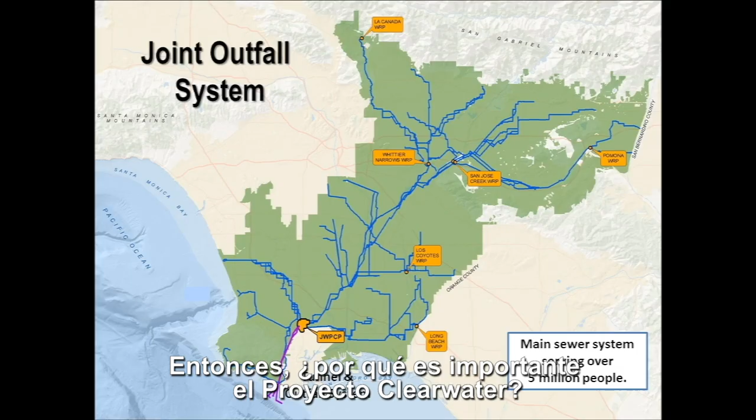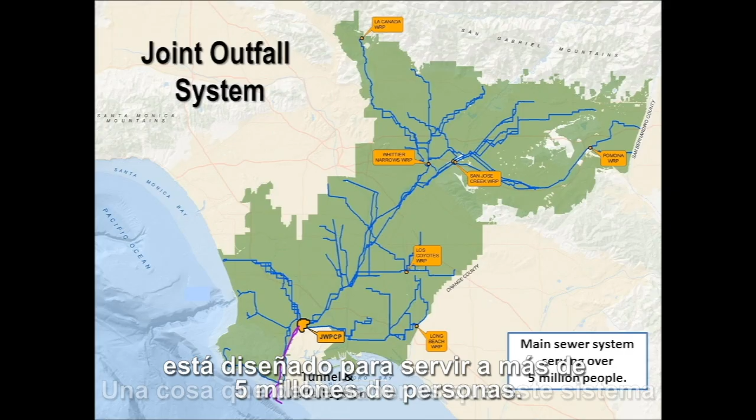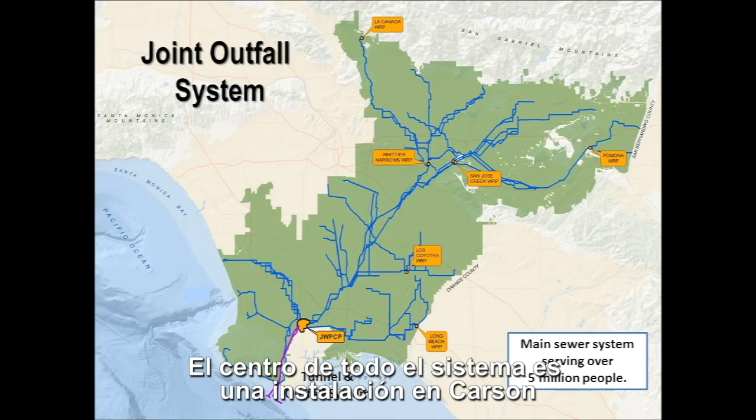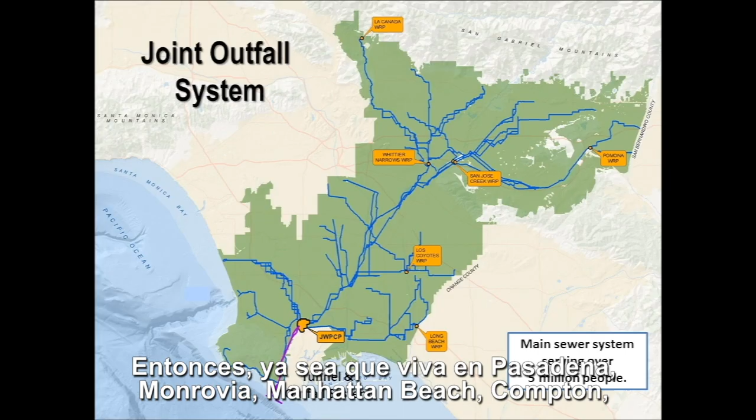So why is the Clearwater Project important? In order for me to answer that question, I need to explain how our Joint Outfall System works. And one thing that you need to know is that this system is designed to serve over 5 million people. And it goes from the beach all the way to the San Gabriel Valley. And the hub of the entire system is the one facility in Carson called the Joint Water Pollution Control Plant. So whether you live in Pasadena, Monrovia, Manhattan Beach, Compton, you depend upon that facility in Carson.

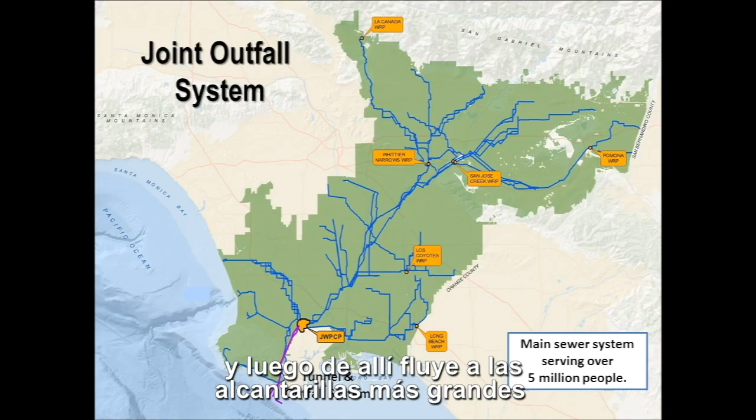And here's why. Well, when you flush your toilet, that sewage or wastewater goes into the local sewers, and then from there it flows into the larger sewers that we call trunk sewers, which are shown here in the blue lines. And the sewage is directed to one of 7 wastewater treatment plants in the system. The one interesting thing about this system is that 6 out of the 7 plants actually remove the solids and put it back into the sewer system so that it all flows down to our plant in Carson, where the solids for the entire system are managed. And we do that because it's much more cost effective to manage it at one location.

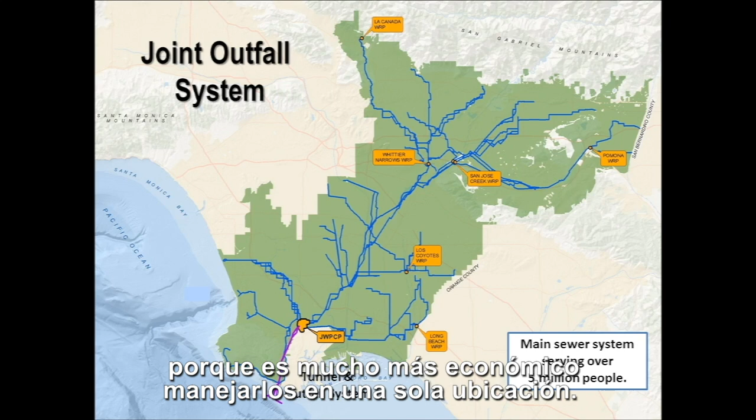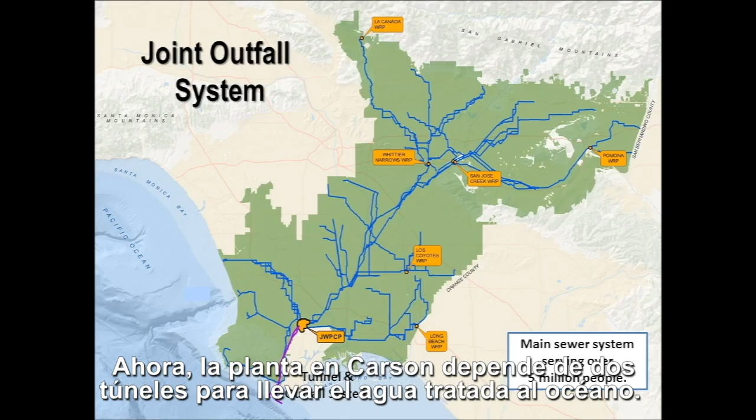Now, the plant in Carson depends upon 2 tunnels to take the treated water out to the ocean. These 2 tunnels, one 8 feet in diameter, the other 12, were built in the 1930s and 50s. So they are old. They're 60 and 80 years old. They weren't really built to current seismic standards, yet they cross 2 earthquake faults.

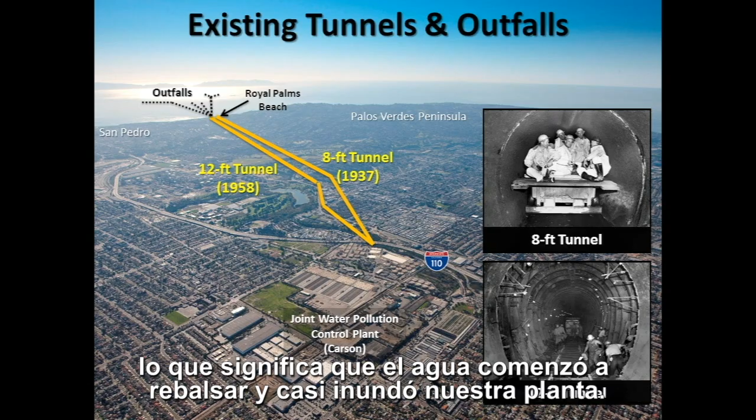They also have a limited flow capacity, which really comes into play when it rains across the LA area. And that is because rainwater gets into the sewer system and the flows going into the Carson plant can more than double, which means the flows going through the tunnels can more than double as well. And back in January of last year, 2017, there were major storms that came through the LA area, and the flows to the Carson plant more than doubled and almost overwhelmed the capacity of the tunnels, which meant that the water started backing up and almost flooded our plant.

So what would happen if the existing tunnels were to collapse because of an earthquake, or there's just way too much water for the tunnels to handle? Well, sewage would still flow into the Carson plant. So the treated water coming from the plant has to go somewhere, otherwise the plant will flood. And we can't have that because it would knock out all the electrical equipment that's there, and it would take months, if not years, to restore to normal operations.

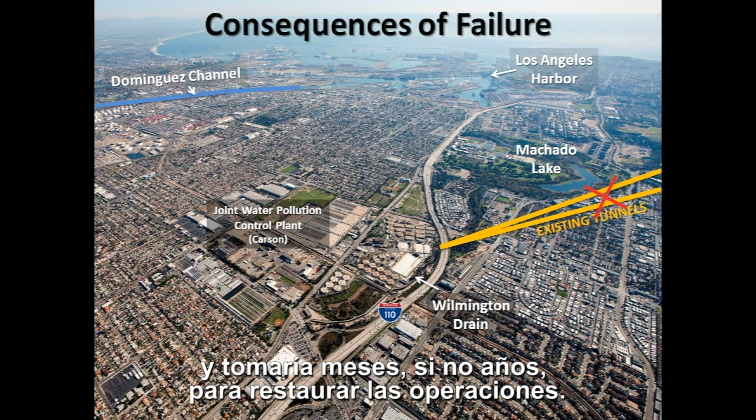So we would be basically in emergency mode. So what we would have to do is to allow treated or partially treated water to come out of the plant into the Wilmington drain and let it flow into Machado Lake.

Many of you know that a lot of money has been spent in restoring Machado Lake, making it into a precious resource. Well, under this emergency situation, this unauthorized, unpermitted discharge, that investment would be jeopardized. But let's say that that measure was not enough. Maybe the Wilmington drain was full of stormwater already, or there's just too much flow going into the plant. Well, now we have more dire measures to consider.

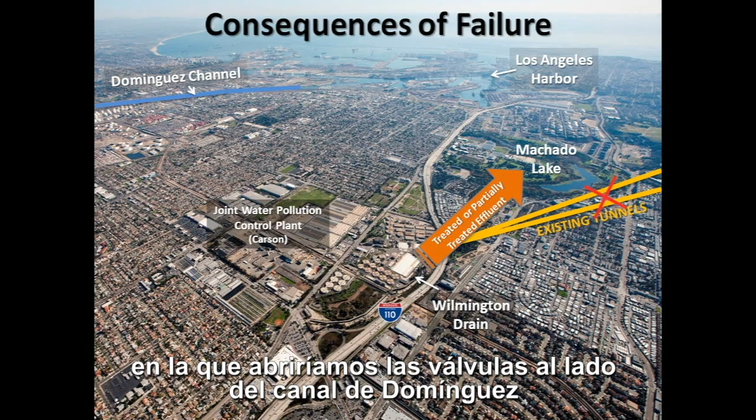We can either let the sewage come out through the manholes and onto the streets, and of course, we wouldn't want that because that impacts public health. So now we would be faced with an even more dire measure, in that we would look upstream, open up the valves next to the Dominguez Channel, and allow raw sewage to go into the channel. And of course, that would flow into the Los Angeles harbor and eventually into the surrounding beaches.

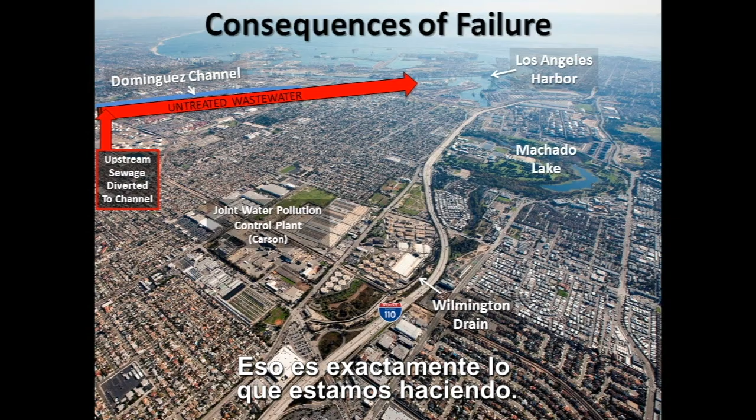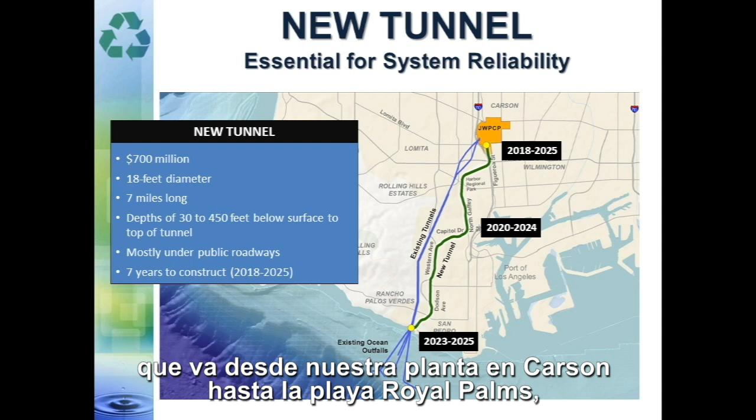So rather than wait for this situation to occur, we want to do something about that today. And that's exactly what we're doing. Which is why we're building a new tunnel that will go from our plant in Carson all the way down to Royal Palms Beach, where we're going to connect the new tunnel to our existing ocean outfalls, shown here in the purple lines. Now, if you don't know what an outfall is, it's basically a pipe that goes at the bottom of the ocean outward, and at the end of the pipe are holes so that the treated water can just flow out into the ocean.

And one thing you'll notice is that the existing tunnels shown here in blue are pretty much like a straight run down to the beach from our plant in Carson. Whereas the new tunnel, shown here in green, is kind of a squiggly line. Well, the reason is because one of the things we heard over and over again from our outreach a few years ago is that people didn't want the new tunnel to go underneath their homes. They would rather have the tunnel go underneath the streets. And that's exactly what we're doing. So the tunnel will follow the streets and under Harbor Regional Park.

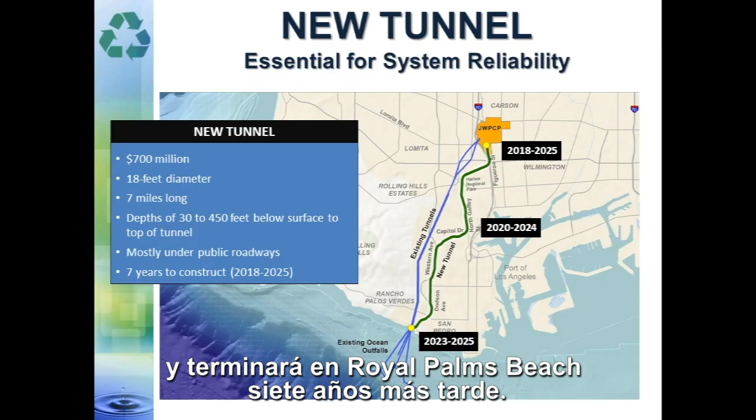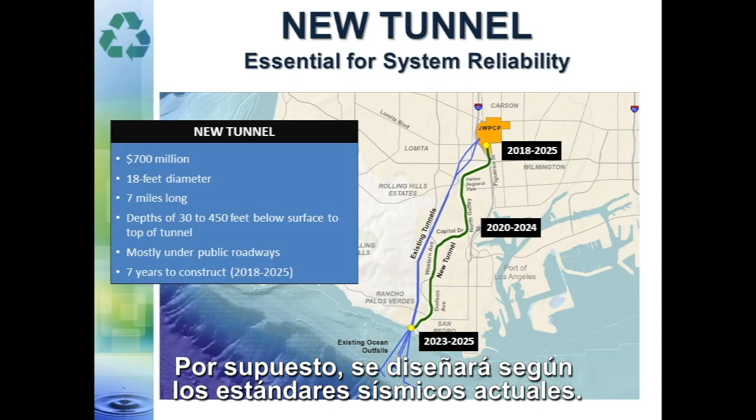So construction will begin later this year in Carson, and then 7 years later, it'll end at the beach. The new tunnel will be about 18 feet in inside diameter, enough to manage the storm water flows. It'll be 7 miles long, and it'll cost about $700 million to construct. And of course, it'll be designed to current seismic standards.

But more importantly, the tunnel boring machine goes about 5 feet, it stops, and then the walls for the tunnel are put in. And then once that section of tunnel is put in, it goes another 5 feet, it stops, and then the next section of tunnel is put in. So the tunnel is built as you go, which means there is never empty space for the surrounding soil to go into. It's always reinforced, and it supports everything above it, all the way up to street level.

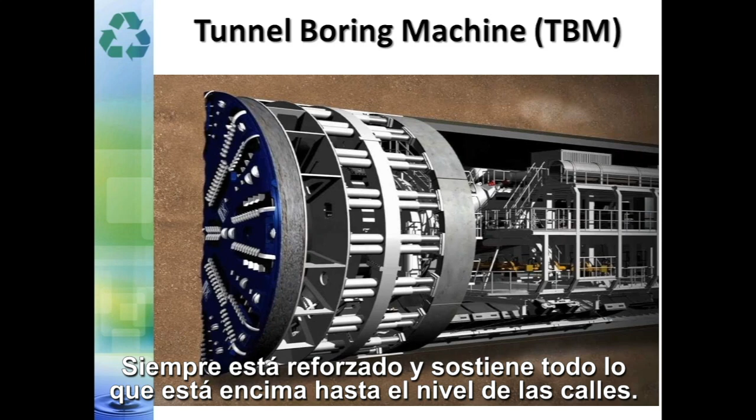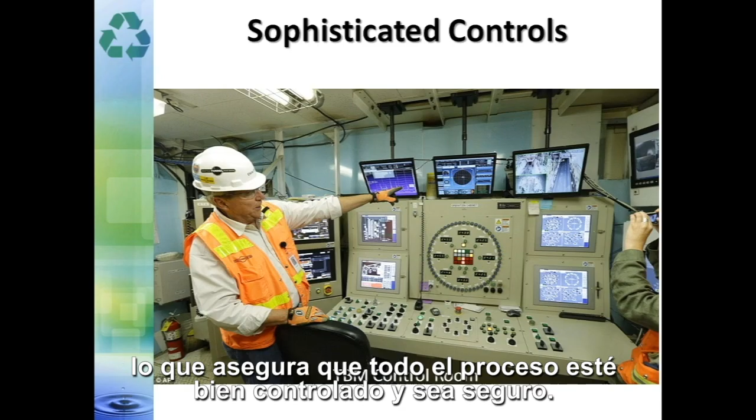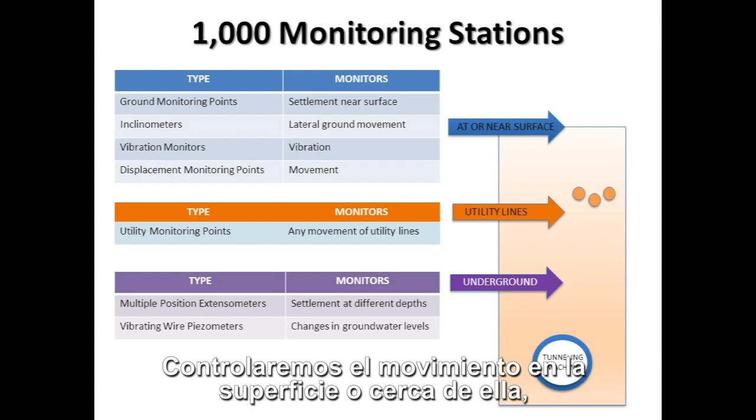If you were to go inside one of these tunnel boring machines into the control room, you would see that everything conceivable is being monitored, which makes it for a very safe and controlled manner of tunneling. Even so, along the tunnel alignment, we're going to have 1,000 monitoring stations where we have sensors at street level to monitor for movement. We monitor the utility lines underneath the street, and we have sensors that go all the way down to the tunnel boring machine, kind of like an early warning system. And so with this comprehensive system, we protect the street above and the adjacent properties.

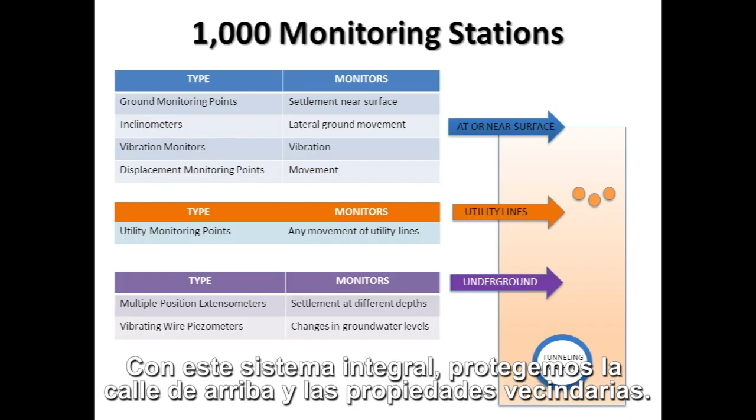As I alluded to earlier, construction is going to start at our facility in Carson. If you were to drive there and go to the corner of Lomita and Figueroa, you would see an empty lot, which is part of our facility. And in that lot, we're going to construct a shaft that's between 50 and 60 feet wide so that it can be used to lower the tunnel boring machine and then allow it, once it's lowered, to start the tunneling.

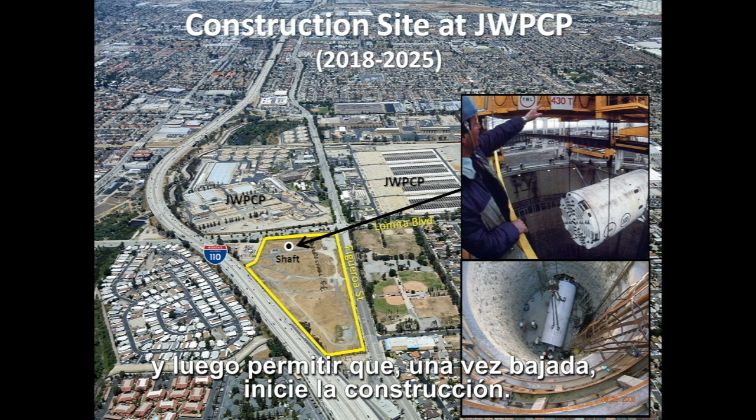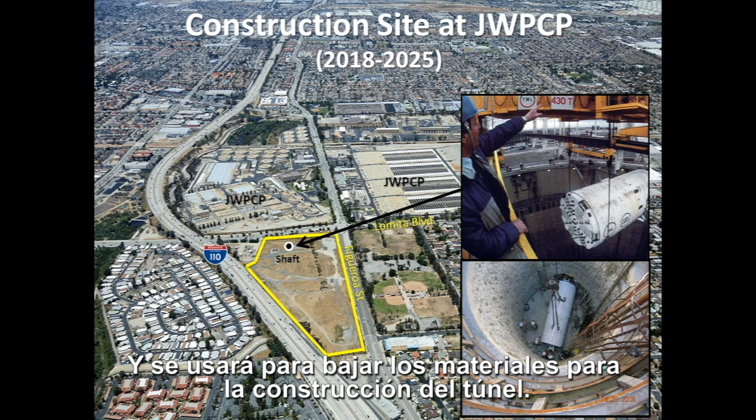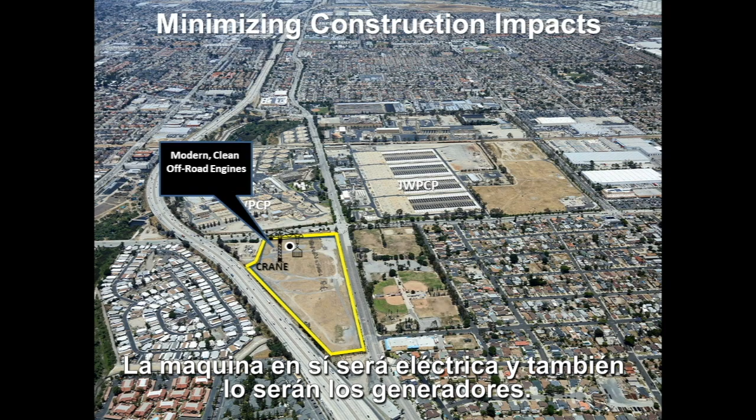That shaft will also be used to remove all the excavated soil from construction, and it'll be used to lower the materials, the tunnel wall sections, for the construction of the tunnel itself. Now, one of the things that we pride ourselves in is being good neighbors. We have done so since we were there decades ago, and we want to continue to do that during construction, which is why the tunnel boring machine itself will be electric. The on-site generators will be electric. And the equipment that requires engines will have modern, clean engines.

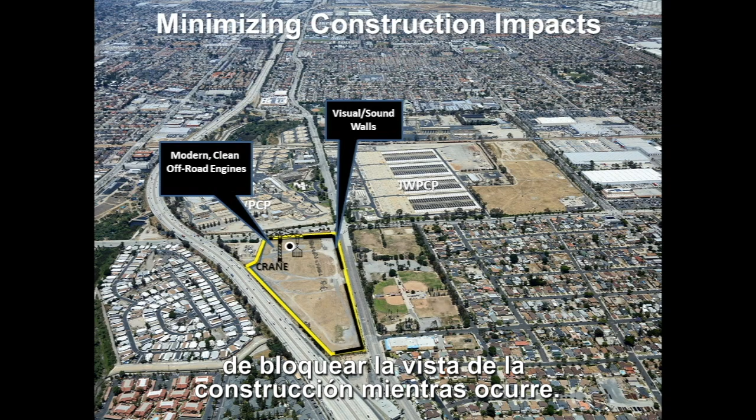We're going to have a sound barrier to avoid sounds from impacting the surrounding neighborhoods. That barrier will also serve as a way so that you don't see the construction while it occurs. The trucks that haul away the dirt will also have clean, modern engines, and the trucks will be directed away from the homes.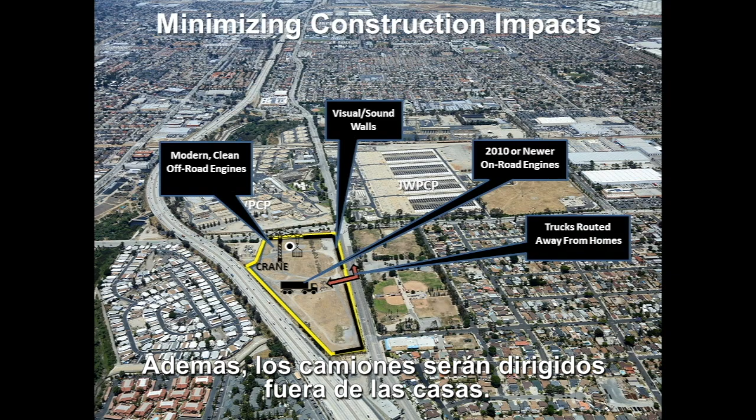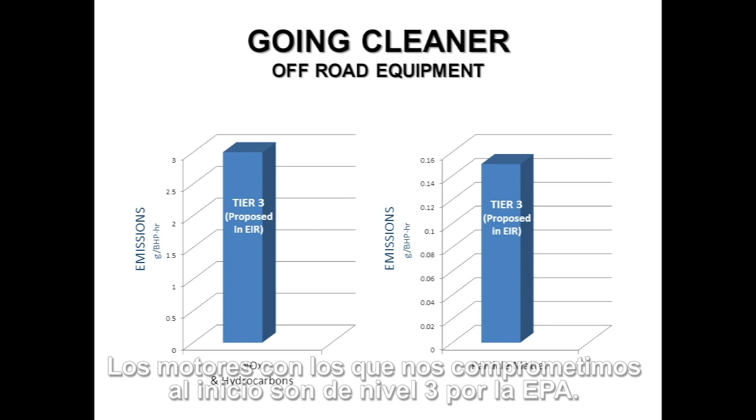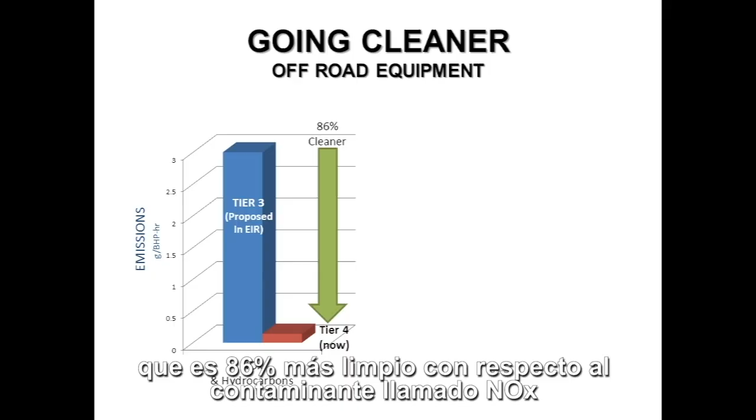So one of the things we committed to early in the planning process was to use clean engines. And the engines we committed to, EPA calls tier 3. But we're going to step it up. We're actually going to use tier 4, which is 86% cleaner with respect to the pollutant called NOx, and 90% cleaner with respect to particulate matter. Our mission is to protect public health, your health, and that's exactly what we're doing.

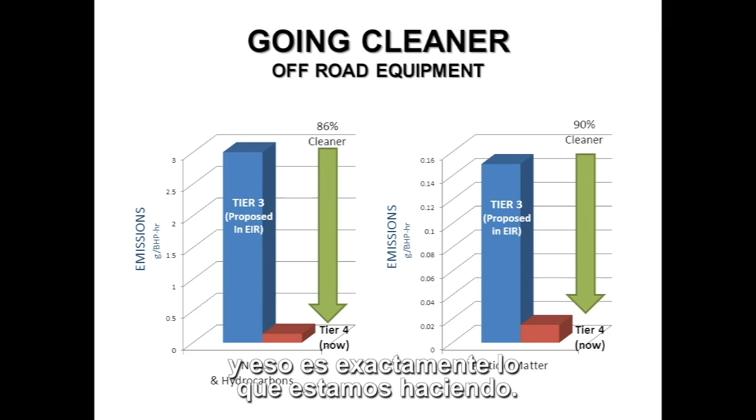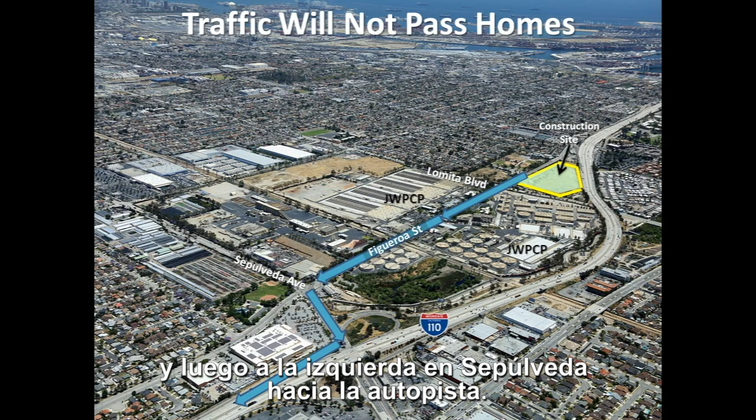As I mentioned, the traffic will not pass by homes. Instead, once the trucks leave the site, they'll take a left turn on Figueroa, go to Sepulveda, make a left, and get right on the freeway. Now you're probably wondering, well, how much truck traffic are we talking about? Well, if you compare it to existing traffic on Sepulveda, you're talking about an increase of 1 to 2%.

But notwithstanding, we're going to work with the City of Carson in developing a traffic plan. We're also going to look, in conjunction with the city, to see if any improvements can be made at the traffic light there. Additionally, we're going to try to avoid peak hours for traffic.

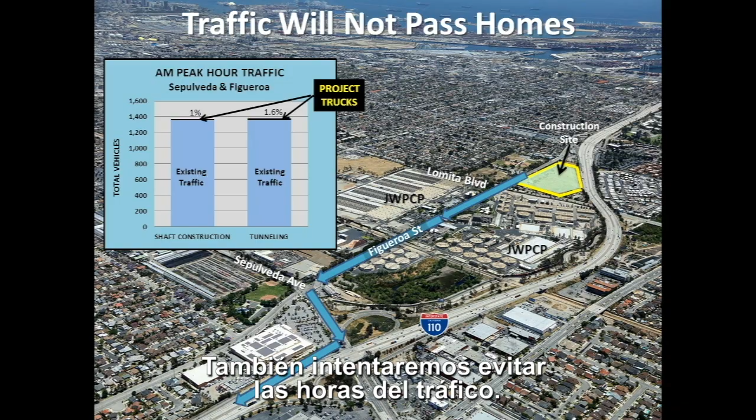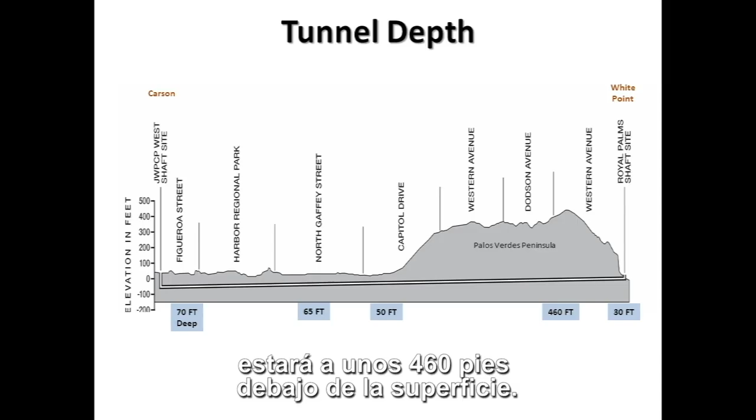So once the tunnel boring machine is in the ground, tunneling will be invisible until it daylights at the beach 7 miles later. It'll start about 70 feet below the surface, and then once it gets into the Palos Verdes Peninsula, it'll be about 460 feet below the surface. And just before the tunnel boring machine reaches the beach, we will have a small shaft constructed so that we can remove the machine and so that we can start the work of tying in the new tunnel with the existing ocean outfalls.

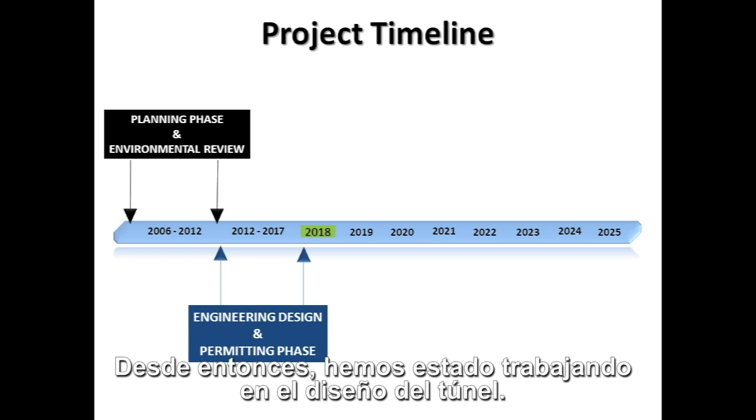So let's look at the timeline for the project. As I mentioned, we're done with the planning phase. The project was approved by our board of directors in 2012, and since then we've been working on the design of the tunnel, which we are wrapping up. And later this year, we will start construction in Carson, and the construction will wrap up 7 years later at the beach.

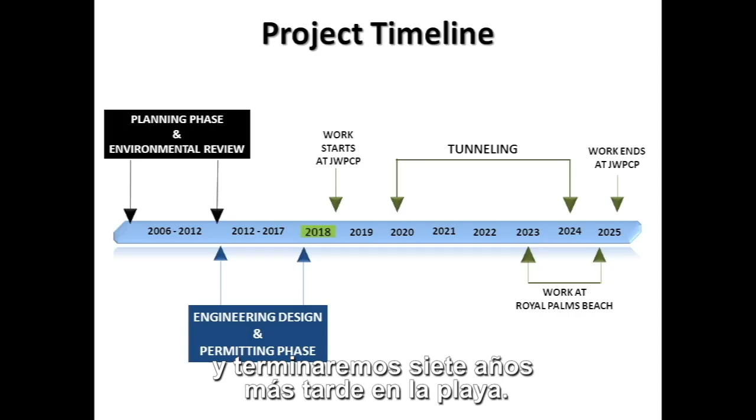Now, we want to continue to be good neighbors during the construction, and part of that is to keep you informed of the events of construction, giving you information. And so we have a Facebook page, we have a dedicated website, and also if you have questions or concerns, you can either email us or you can call us. Because our goal is to be your advocate, to hear from you of concerns or questions so that we can answer those. And we plan on being there for the next 7 years, and so we want to be your partners in this infrastructure project.